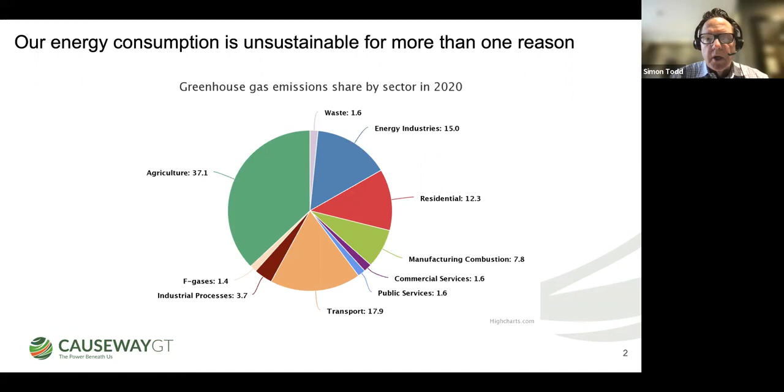And I think it's fair to say that there's progress on mobility, transport, electrification of transport particularly, and there's progress, particularly in Ireland, with the greening of the electricity grid. But it's not just that.

It's also about affordability. So the graph on the left shows the power density of different energy sources, and it shows that geothermal is in the same mix of power density as wind and solar here in the middle of the chart. But it also shows that compared to gas, oil, coal, and nuclear, these renewable energies are actually much lower power density than fossil fuels.

That said, over the last few decades, the cost of fossil fuels, particularly oil, and now natural gas, I would argue, has been creeping up and up. So, for example, in my career in the oil and gas industry, when I started, $16 or $20 a barrel would be happy days, and less than 10 would be pink slips and P45s. Nowadays, happy days in the oil and gas industry is $80 a barrel, and today's $120 a barrel is exceptionally good. But this is a result of us having to put more and more effort into extracting oil.

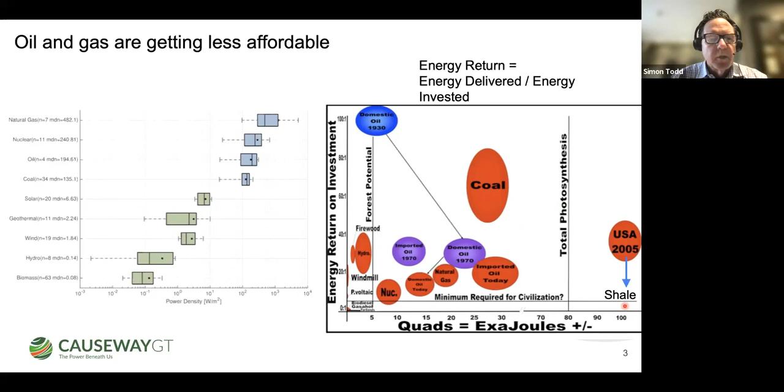And then the third reason is security, reliability. And this is illustrated for decades by oil. You know, a sniff of a crisis affected oil price the next day or the same day. And now that gas has joined its elder sibling as a global commodity with LNG and far-reaching pipelines, gas has the same problem of supply-demand tightness and relaxation, of geopolitics, of trader anxiety, and of course, unfortunately now, the cost of war and conflict, in this case, in the Ukraine.

And Ireland is right at the end of a very extensive pipeline infrastructure across Europe. Not all the gas is coming from Russia, of course; the UK only takes about 1 or 2% of Russian gas. Most of it comes from the North Sea and some LNG imports. But the island of Ireland is at the end, has no LNG import, and is at the end of an infrastructure that has 3 pipelines in the Irish Sea, all coming from a single terminal in Moffat in southwest Scotland. And so that represents a security risk as well as a price risk, because we're dependent on the price structure and price swings in the rest of the infrastructure.

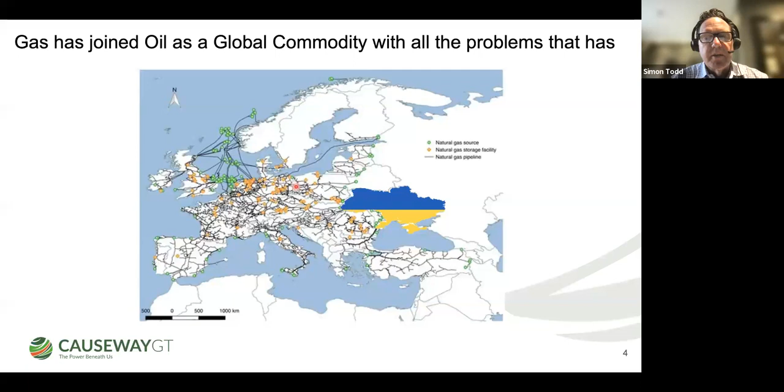So this is all captured in the classic notion of the energy trilemma. And this is the way I like to think about the energy transition, that we need to not just solve for sustainability, but we also need to solve for affordability, particularly for those that are already impoverished in terms of energy. And we need to solve for security. The energy that we use needs to be reliable. It needs to be secure in supply.

And I've put a picture here of Gordon Lyons, the Minister of Energy for Northern Ireland, holding up the report published late last year from the energy strategy team in Northern Ireland. And I've given them two thumbs up because they've got the energy trilemma pictured on the front: secure, affordable, clean. That's what we need to be about.

So how do we go about this? We're starting to get into what problems we're trying to solve. This is a Sankey diagram, or energy flow chart, that we put together for the whole island of Ireland, using 2018 data from both Northern Ireland and the Republic of Ireland. And what this shows is the flow of energy from source or primary energy requirement from the left-hand side through electricity generation here in the middle, and then over to the right-hand side where it's used in different sectors.

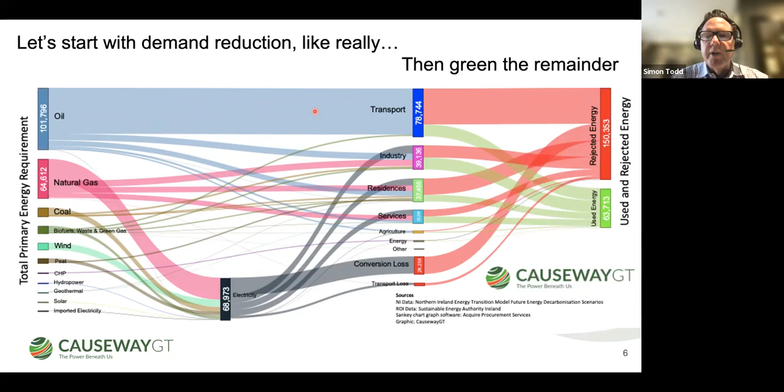So that's job number one with the energy transition, is to radically reduce our demand through re-engineering our systems and improving efficiency. And it's not just about technology and engineering, it's about societal norms and expectations. I've picked on SUVs here. There's a stat going around that if SUVs were a country, they'd be the sixth biggest emitter in the world.

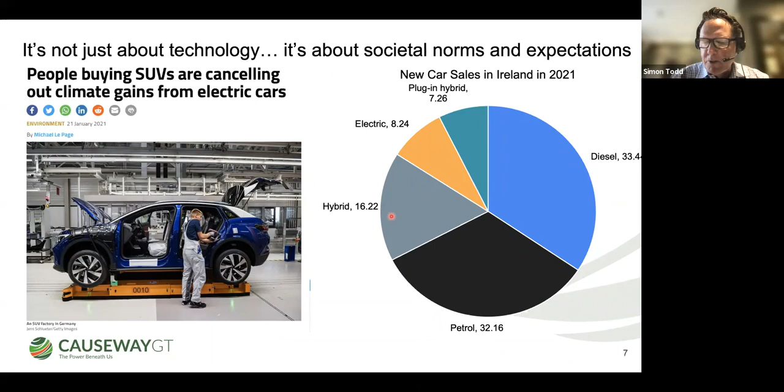People are still buying SUVs and running around in them, even though we are doing a better and better job of hybrid and electric plug-in hybrid sales; this is Republic of Ireland data from last year. But we need a way of changing our attitude and our cultural norms so that the Range Rover Sport is not the preferred option anymore. It's go get yourself a Tesla Model 3 if you want something fancy, but much more sustainable as an option.

So then on to geothermal. Everybody on this call, I think, will be familiar with the science of geothermal. This is a map put together by Helen Doran, and it shows the geothermal hotspots of the world associated with plate tectonic boundaries. And it also shows some of the volcanic hotspots away from plate tectonic boundaries. The most significant thing for me is it shows that most of the world is kind of bog standard 25 degrees centigrade per kilometer geothermal gradient.

And that includes the Irish and British Isles right up there towards the top. So in other words, if you can make good use of geothermal in Ireland, it means you can make good use of geothermal almost everywhere in the world.

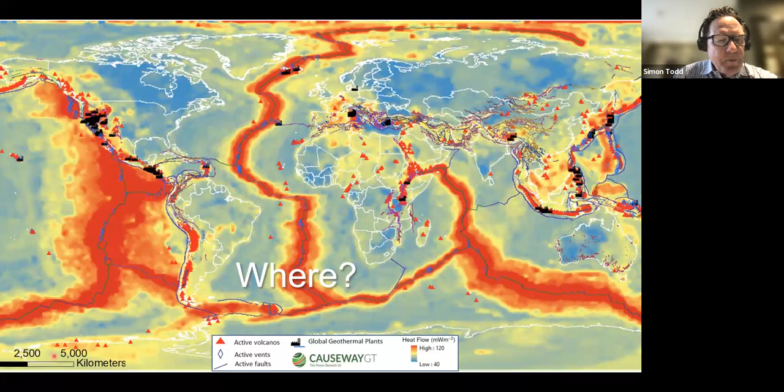Meanwhile, we do know that geothermal is being used around the world. There's electricity generation from lower temperature resources, 80 to 180 degrees centigrade, but they typically are very close to the surface, less than a kilometer from the surface.

The big energy, 50% of the geothermal energy that's used, is actually used in combination with heat pumps in domestic, commercial, and industrial settings. And then there's some direct use. So this is to give us a flavor of what might be possible here in Ireland.

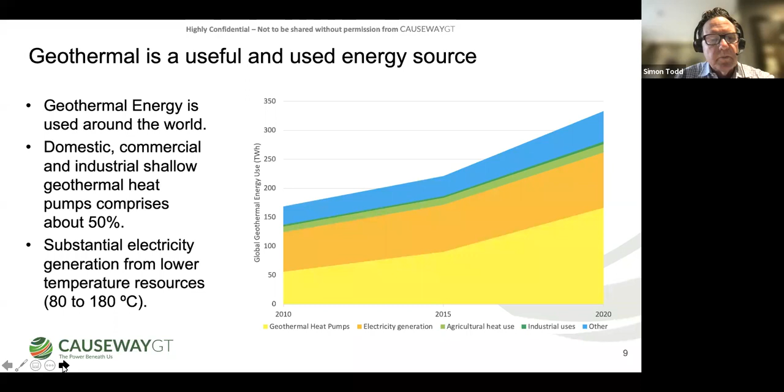A reminder of the principal archetypes. There are two geothermal resources, I would assert: shallow, less than 500 meters or thereabouts, typically used in combination with heat pumps. It's also a fantastic storage medium, shallow geothermal, which is important and we'll touch on again. And then the second one is deep geothermal, typically more than 500 meters, actually considerably more than 500 meters in settings like ours. And that direct heat is for power generation or direct use of heat.

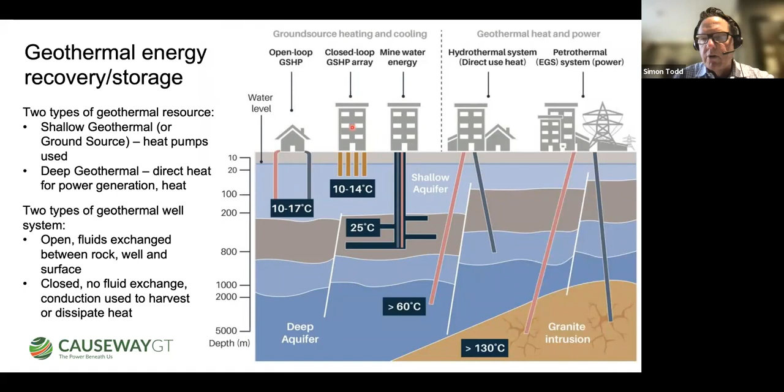Basically two types of geothermal system. I'm really oversimplifying this, I know, but one I would say is open loop, where fluids are being exchanged from the well into the rocks and back again. And the second is closed loop, or advanced geothermal systems, AGS, where there's no fluid exchange and instead conduction is used to harvest the heat. And on this BGS diagram, the shallow systems are on the left-hand side, and the deep systems are on the right-hand side.

So now to problems. I've got three problems to posit that we could solve or address with geothermal. The first one I'm going to point to is the issue of variability and intermittency of wind and solar. Just recently, Ireland did an auction on nine new gas generation power plants, apparently one or two of them to be hydrogen ready, all about them being peaker plants.

And this is because even when you put more and more wind and solar into a regional or national grid, you still need dispatchable thermal capacity to cover off shortfalls when the wind isn't blowing for a number of days, or the sun isn't shining for a number of days. And I've put a dirty dozen here of different mechanisms of providing storage of electricity, or storage of energy in the case of thermal, and none of these are really at the moment up to covering off periods of days and weeks.

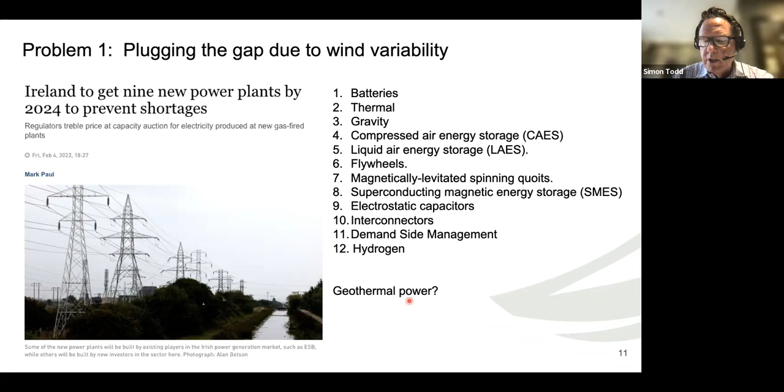Batteries can do very well for nanoseconds, seconds, minutes, and a few hours, but they can't as yet do days and days and weeks. And so the romance about geothermal power is, can you use geothermal power as a dispatchable base load to cover off and complement wind and solar? And an answer for Ireland is unfortunately no, or at least not for some time.

It's really hard in Ireland because the temperatures required for any reasonable efficiency in power generation are at substantial depth. Although binary organic Rankine cycle turbines can generate electricity at 80 degrees centigrade, they really need about 120 degrees centigrade fluids before you've got any reasonable efficiency, and even this is still only 15%. And when you combine that with drilling costs, and the blue dots are US Department of Energy data, it shows you that to get to the temperatures that you require in Ireland, you're talking quite a lot of money, $15 million per well or more, and the economics just don't make sense at that.

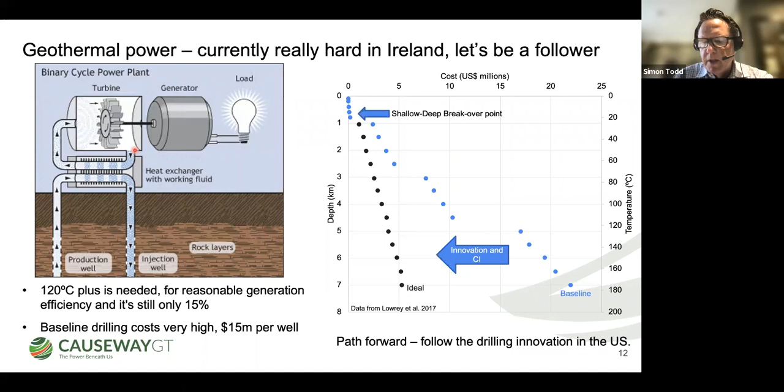So I'm just going to pause for a moment before I address the second problem and do a little sidebar on heat pumps, just to make sure that everybody falls in love with heat pumps the same way I have and Causeway GT has. Heat pumps are marvelous pieces of engineering. They actually have efficiencies greater than 100%. And how they do that is they soak up heat from a source through a heat exchanger, and through evaporation, compression, and... I've lost the word.

It'll come back to me, but through the heat pump process, the temperature is elevated, and more heat energy is delivered to the target sink than is used as electricity. So in other words, in this particular model, for 5 units of electricity doing the work of the heat pump, the compression piece, and soaking up 10 units of heat from whatever medium, in our case geothermal, 15 kilowatts of heat are delivered. So the COP, the coefficient of performance of the heat pump in this case, is 3.

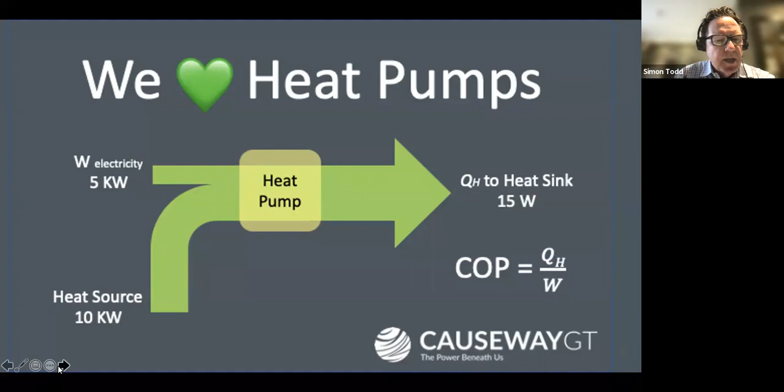Heat pumps are actually able to do much better than that, particularly where you're not having to elevate the temperature so much. So why am I doing this little sidebar on heat pumps and COP? So here's a typical sort of ground source setting, everything from freezing conditions in the subsurface to typical 12 degrees centigrade temperatures. To get to a sink temperature of 55 or 60 degrees centigrade, which is usually the minimum requirement to eliminate Legionella, you need a source temperature of 12; a COP of 3 gets you to the required delivery temperature.

Then over in this right-hand chart, I put the same COP of 3 and I track it up along the y-axis of levelized cost of heat. And what you see here is that if I have expensive electricity at 14 pence per kilowatt hour, my gas boiler is actually more cost efficient than my heat pump. But if my electricity cost comes down to 10 pence per kilowatt hour, my heat pump is now competitive. In other words, one of the primary factors for the competitiveness of heat pumps is electricity price and how that relates to the coefficient of performance of the machine itself.

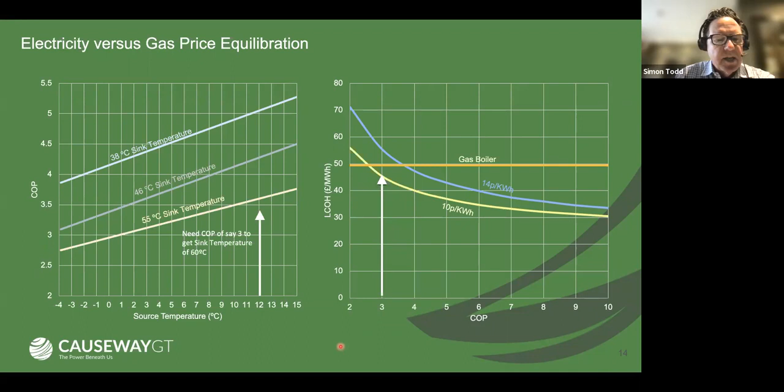So then problem number 2 is heat above 80 degrees centigrade. So this is heat that would be in low-grade industrial processes and high-grade industrial processes. I don't think we can do much in the very high temperature regime, like in terms of metals manufacture, aluminum or steel. But I do know that we can do a lot of good and a lot of elimination of fossil fuels in the lower temperature range from 80 to 140.

How's that so? Well, for example, in the northeast of the island, there's some super opportunities of open loop permeable reservoirs where the geothermal gradient's a little bit elevated as well, and you can see 50 degrees centigrade at 1.5 kilometers depth. Using industrial scale heat pumps, megawatts in scale, a 50 degree centigrade source temperature is really useful when you put a heat pump on top of it, and it can be elevated up to 125 degrees centigrade, which is a bit of a magic number because once you get there, you're able to generate steam, which is a very common fluid used in many different manufacturing and industrial processes.

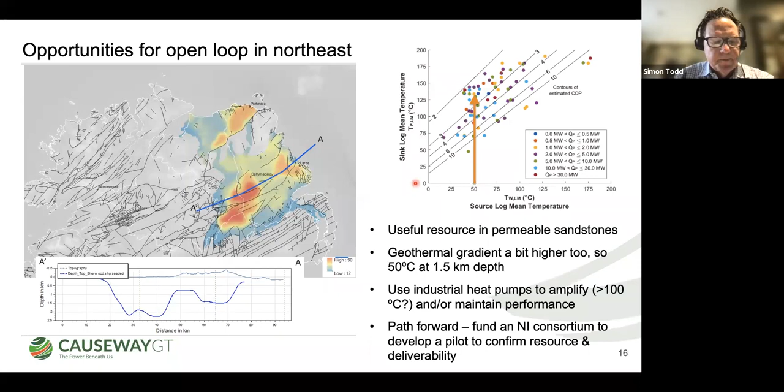So what I'll argue to the group on the call is that one of our priorities is to make a demonstrator of this happen, and County Antrim and the region is probably the favourable place to do this. But that's not all.

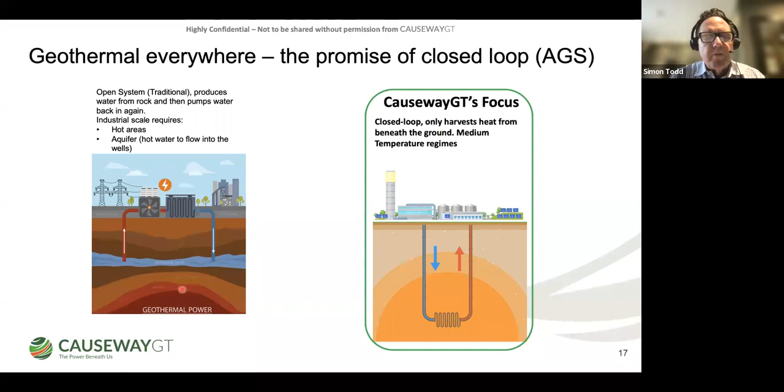In Causeway GT, we're pretty well focused, not exclusively. We will consider open loop, but we're pretty focused on closed loop because although it's got the slowness of conduction to deal with, its advantages are significant in terms of not needing porosity, not needing permeability, not needing to exchange fluids, not needing to worry about induced seismicity, not needing to worry about contamination of aquifers or bringing geothermal brines to the surface, and never ever having to mention the word frack in polite company outside of the state of Texas. So we're focused on closed loop. What can be done with that?

So there's a recent study that's just been released beginning of the year from Cornell University. Beckers et al. are the authors. They ran a number of interesting scenarios, simulation models on closed loop systems. And what they found was the levelized cost of heat from these different closed loop scenarios, the mean, was $46 per megawatt hour. And that's quite attractive. Whereas for electricity, it was over $800 per megawatt hour. And this is essentially the inefficiency of low temperature electricity generation coming through in these costs. So they agree that for lower temperatures, power generation is very challenging, is the phrase they used. But I have to say they did not include heat pumps in their study.

They did mention, but they did not include it in any of the analysis. Ongoing work in Causeway GT, where we've been doing some modeling. Alison Isherwood has been leading the charge on this, and understanding the nature and sensitivities and controls on conduction-only systems, closed loop. And we've been examining some economic sensitivities that actually support the findings of the Cornell study and present a credible pathway to commercialization of 100 degrees centigrade plus heat.

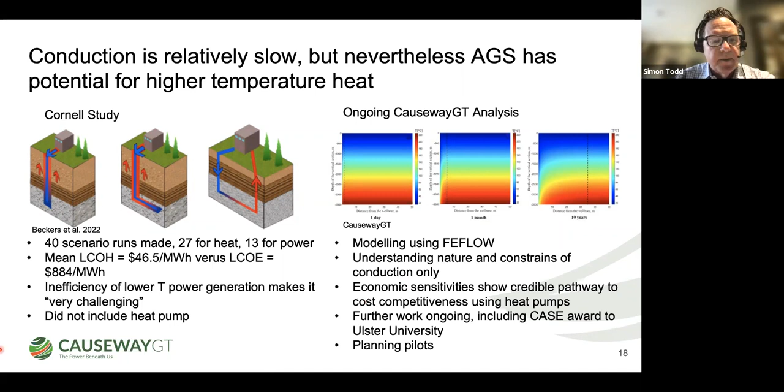There's further work ongoing, including some work led by Professor Neil Hewitt in Ulster University, where we were awarded a CASE grant for that work last year, and we're planning some pilots to test this technology. And if we can make that work, we can do a lot of decarbonization of lower grade industrial heat. And then the final problem is everything else.

Now this is my chart of the distribution of heat use in Ireland. It looks a bit different from the recent SEAI study, and I'm still trying to understand why they've come up with a bigger proportion of higher temperature heat. But suffice it to say that more than half, and I think considerably more than half of the heat that we use is actually less than 80 degrees centigrade. Space heating, water heating, space cooling as well. And this brings us right into the domain of heat pumps and geothermal heat pumps specifically.

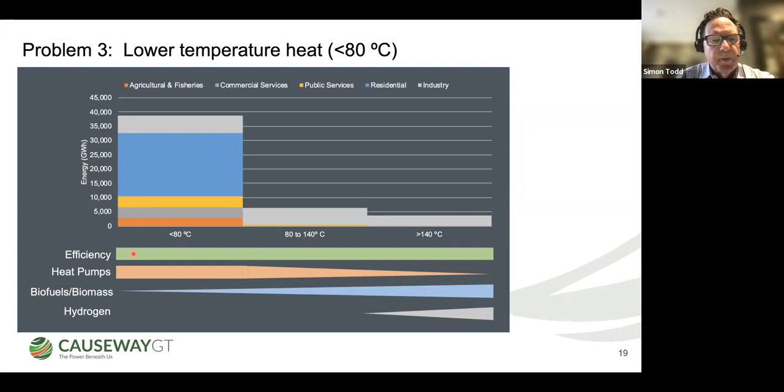Here is some data from the SEAI report. It's a really good report. There's a couple of things I'd quibble with, but some really good information, good insight. So this one here is for residential, commercial, and public service buildings, a breakdown of the suitability of different technologies for heating and cooling these parts of the built environment. And here are air-source heat pumps and geothermal heat pumps, or ground-source heat pumps, towards the left. And as you can see, residential, a lot of potential to do good with heat pumps, be it ground-sourced or air-sourced.

In commercial, they conclude that commercial buildings are actually often leakier than residential buildings. That's one of the things I'm kind of scratching my head about, because that came as a bit of a surprise to me, to be candid. But again, the potential with some fabric improvement in commercial buildings is huge. And then similarly, public buildings, hospitals, large schools, libraries, government buildings. Lots of potential there.

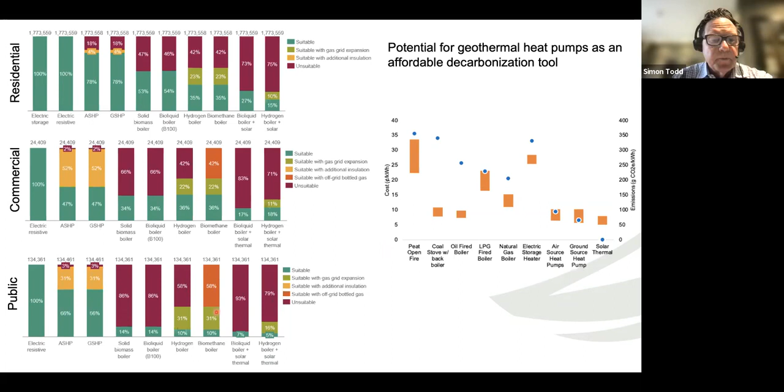And then on the right hand side, I've taken some older SEAI data on the costing of different residential heating mechanisms, and geothermal ground sourced wins the day in terms of efficiency. Also very low emissions, of course, particularly as the electricity used gets cleaner and cleaner. But solar thermal is good as well, and obviously air source heat pumps are good as well. So an interesting combination there between cost competitiveness, emissions reduction, and on the left hand side, suitability. So I actually think that we ought to be persuading policymakers to change the dimension on the use of shallow geothermal heat pumps.

Here, for example, is the case of commercial and industrial lower temperature heat. There's a cartoon picture of Microsoft's expansion of their campus in the state of Washington in the Northwest United States. It's plus 10 megawatt thermal heating and cooling, and it's all served by a geothermal system down to about 150 meters depth, both storage and borehole heat exchangers, and a vast heat network of pipe work supplying it. And a very low emissions product as a result.

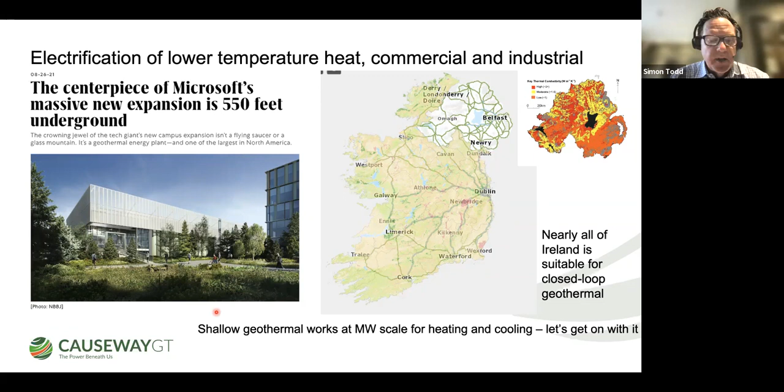So why aren't we doing this already? I hear you ask. And the answer seems to be a combination of a number of different factors. A good way to get to the answer is to compare ourselves to other countries with higher uptake of geothermal. And the poster child is Sweden.

And it's an interesting poster child because, according to Helen's map, Sweden, as you might expect if you're a geologist, is actually lower geothermal gradient than Ireland and Britain, and certainly lower than some other countries in Western Europe. But having said that, Sweden is one of the highest, if not the highest, geothermal energy user, and the vast majority of that's heat pumps, ladies and gentlemen, at the scale of kilowatts to megawatts that I've been describing.

So the little cool colors over in Ireland and Britain in terms of geothermal usage, we need to fix that, right? The reasons for slow uptake seem to be about ambition. Sweden has been decades on the journey of decarbonization and are blessed by renewable resources like hydro, I have to say. I think the second thing is about awareness, and its cousin, myths and legends. People say things like, well, heat pumps won't work on leaky homes, and the retrofit's too expensive, or things like that. There's a capability issue.

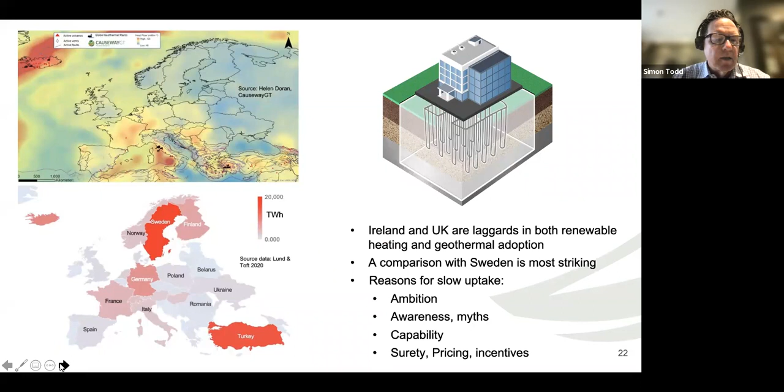In other words, if I'm putting a geothermal heat system underneath a commercial building, I need to know through a power purchase agreement or heat as a service contract that the owner of the building is going to be using my heat for 15 or 20 years, for whatever the duration of the agreement and the project actually is. So here's a little bit more detail about electricity pricing.

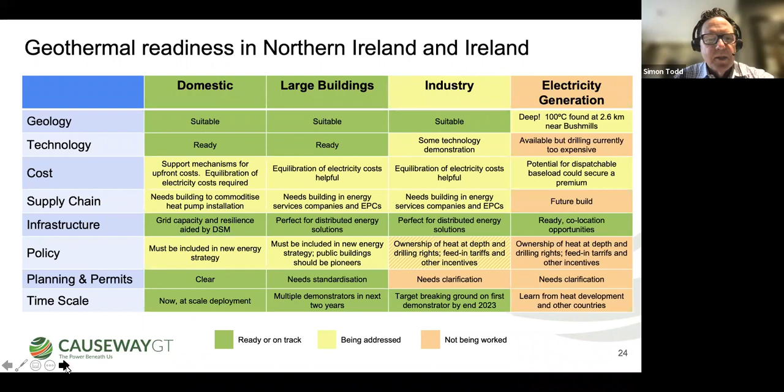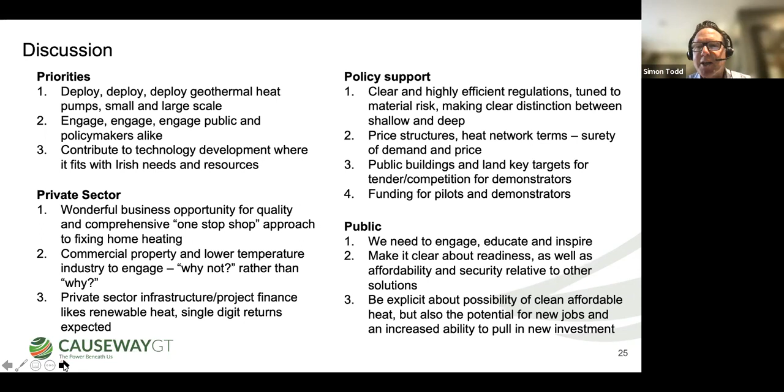And there's also an opportunity to consider job creation and competency and capability creation, both for technical engineers, installation and maintenance and operation, but also for masters and PhD type engineers and geoscientists to be involved in this fledgling and growing industry. And my Causeway GT colleagues and I are firmly set in the vision that we want Ireland to actually become a centre of excellence for geothermal energy in the future.